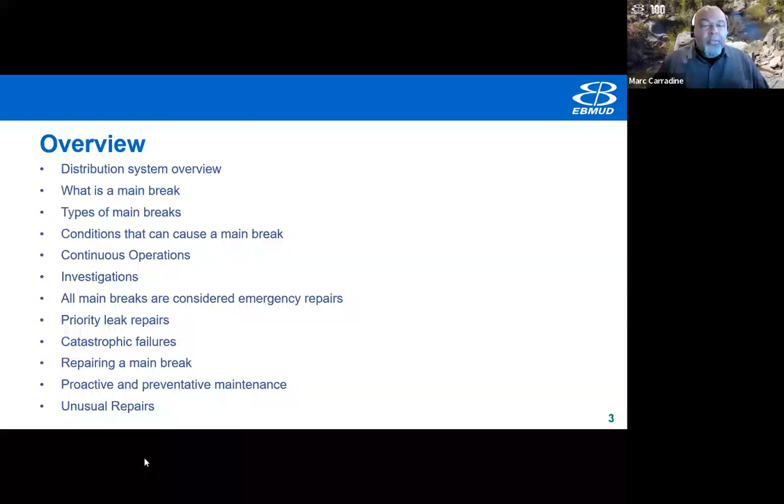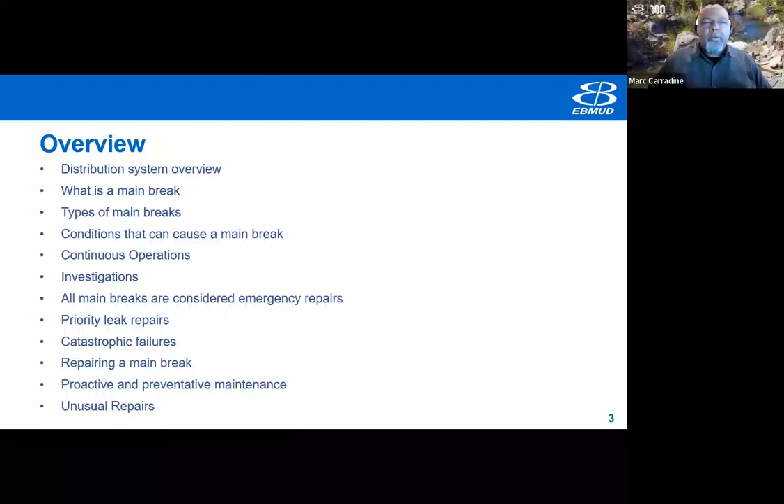How we prioritize our leak repairs. I'll show you some impacts on catastrophic failures, and then I'll walk you through repairing a main break, and then I'll talk a little bit about proactive and preventative maintenance, and then I'll show you an unusual break that we had earlier this year, somewhere late summer. So with that, next slide.

The distribution system. EBMUD serves 2 counties and 29 different cities, from Crockett south to the unincorporated sections of Hayward, and from Alameda east to Walnut Creek and portions of San Ramon. EBMUD's Distribution Maintenance and Construction Division has 5 work units, which are responsible for the investigation, inspection, and maintenance of 4,200 miles of distribution pipeline. In that, we have 60,000 plus system valves and approximately 31,000 fire hydrants district-wide. Next slide.

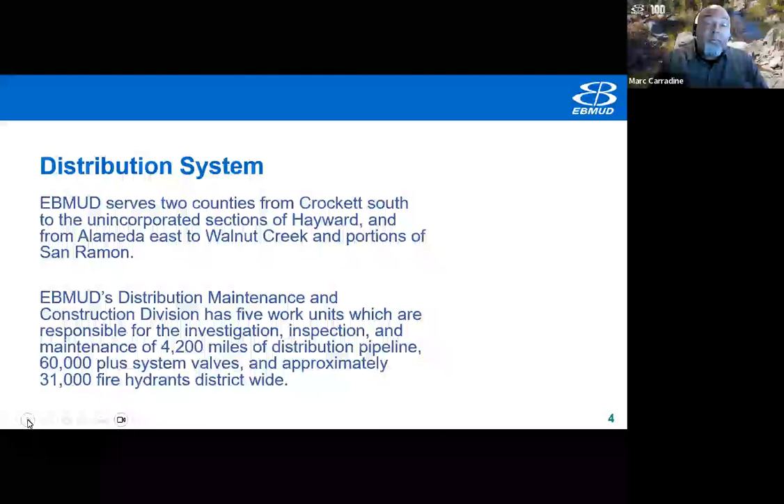What is a main break? The American Water Works Association defines a water main break as a failure in a water main that allows the escape of water and may allow the entrance of soil and other material into the pipe. This is true in some cases. At EBMUD, about 90% of our main breaks, we never reduce - we throttle the main down, but we never have negative pressure. We always have positive pressure on the main. So therefore, there's really no chance of any kind of contaminants or soils getting into the pipe. We're very careful in terms of the process that we take in making repairs. Next slide.

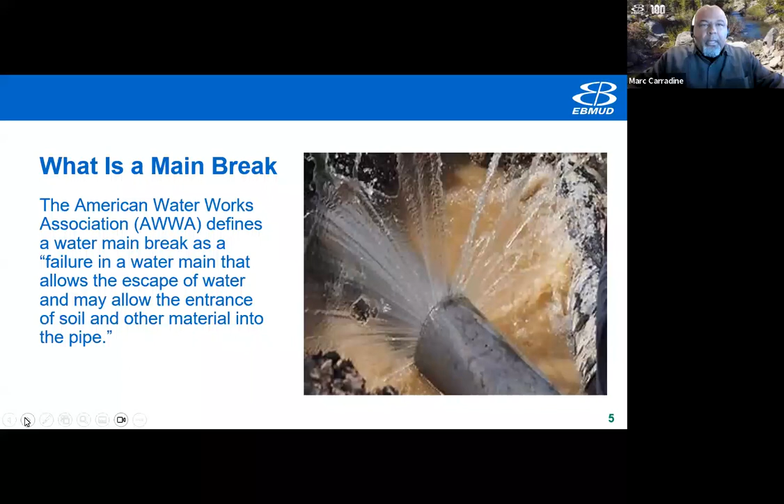These are some of the types of water main breaks. On the top, that's a full circumference break, and over to the right you also see how the pipe broke. That's typically done through movement of the ground. Below that is a longitudinal split, which sometimes can go from one end of the pipe to the other. Since pipes are put in sections, that would be probably the only section affected, and sometimes our pipes are up to 20 feet in length. That's typically done through corrosion or pressure spikes in the main. Below we have damage by others and pinholes from corrosion. The one in the middle was probably caused by damage from someone digging or excavating around our utility and didn't exercise caution to make sure another utility was daylighted before they continued to dig down. To the right is a picture of a steel water main where corrosion has taken control of the pipe and allows for a leak through small pinholes. Next slide.

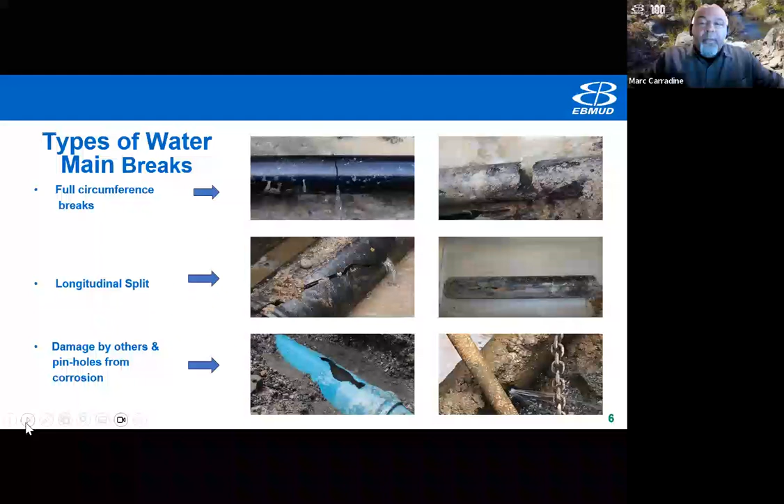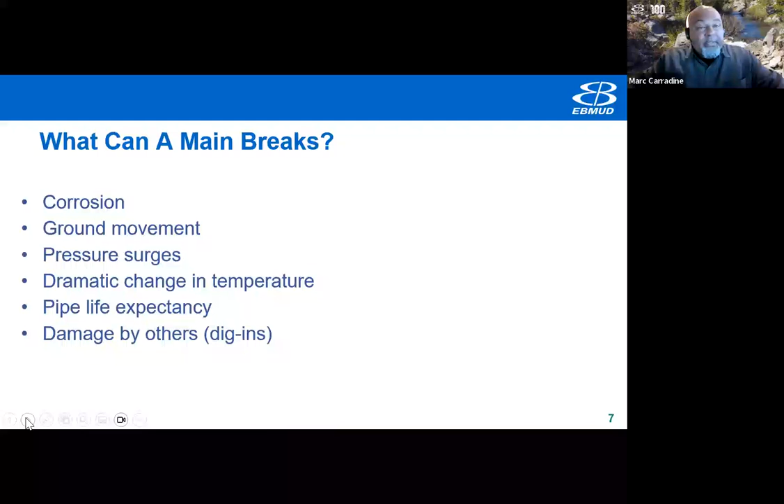So what can cause a main break? Corrosion from the soils, ground movement, pressure surges, sometimes dramatic change in temperature, pipe life expectancy, and damage by others.

So in the process of identifying leaks, we have a continuous operations work unit that's 24/7. Through our continuous operations, we receive about 13,000 calls annually, and 1,100 shutdowns. We have about 1,400 road closures and 300 hit hydrants, fires, and notifications.

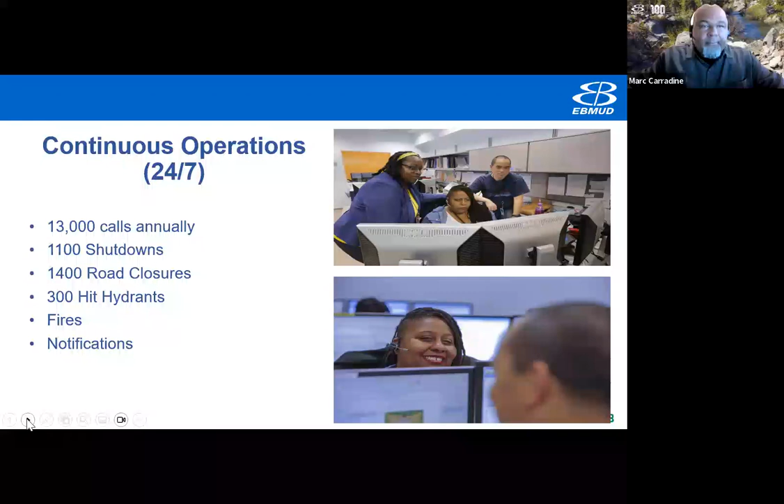This is the work unit that really is our contact to the public. So what happens when a call comes into our dispatch center? Basically, we dispatch an investigator and they go out to the site, and what they do is identify if there's a water source.

And if they can identify that it's potable water, then they set up BMPs, best management practices, which is basically sediment control, because we can't allow sediment to go into the creeks and streams. So we put up dams with sandbags to control the sediment. We also control the flow of water.

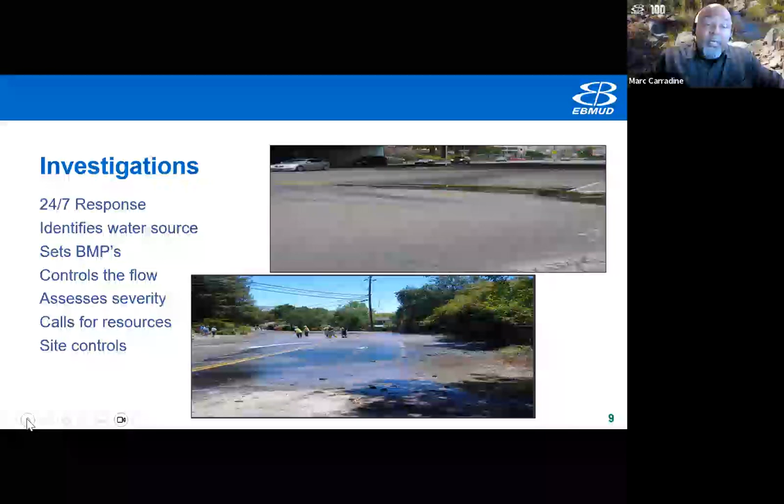We assess the severity of the situation, and we call for resources, and we set up site controls.

All main breaks are defined as emergency repairs, and the reason why is because they are subsurface leaks. We have no idea what's taking place underneath the ground, other than we know there's signs of water through our acoustic devices. They worsen by the moment. They cannot be controlled, you can only monitor them.

They are reactionary and scheduled, not planned events. They have the potential to destroy public and private property, as well as destroy streets and roads, and can harm fish and wildlife. Over to the right, you'll see that there's a priority.

I'm going to date myself here, but if you ever watched the show MASH, the 4077, all of the patients or the wounded that came in were treated on a triage basis. So this is basically what we do.

If you look at the picture on the bottom left, you'll see this is what we prioritize as a P5 leak. We have to respond to that immediately, and we're required to fix it within 24 hours.

Next to it is the P4 leak. I know the picture is somewhat small, but if you can see off in the distance there's a glare, and that glare is water that is surfacing. That's a P4, and we must have that leak repaired within 7 days.

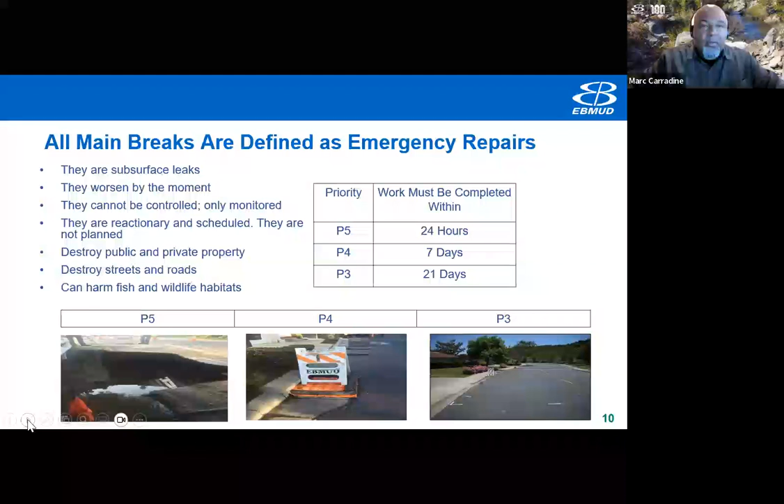If you've ever had work done on your street, you'll see a bunch of color paints like yellow, white, blue, and red. Those are all the utilities marking out their infrastructure.

So this is examples of catastrophic failures. On the top, that's Seminary Avenue in Oakland, which was a 6-inch cast iron main that actually broke. And then below that, there was a 6-inch main on a court in McLeod in Danville.

You can see the damage that takes place when it's a catastrophic event, all the work and restoration that has to take place in order to get out there first and actually start performing the work. So these things could be a big risk to the public and public safety.

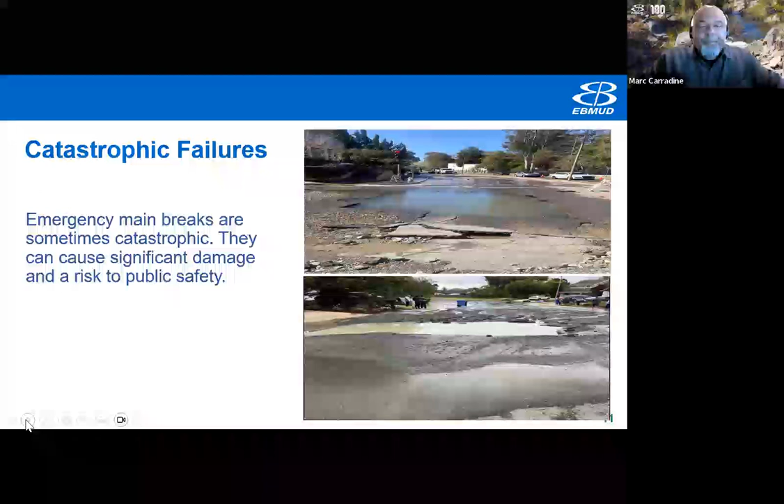This photo is of a recent main break we had on Hiller Road in Oakland, and it's a steel main, about 13 feet deep.

As you can see, the complexities of actually working to maintain or repair a water main, because water erodes anything that comes to it if it has pressure. The main was 13 feet deep here to the top of it. So in order to get down, we had to excavate, and the ditch kept caving in. Basically what is captured here is that main breaks are lengthy and disruptive.

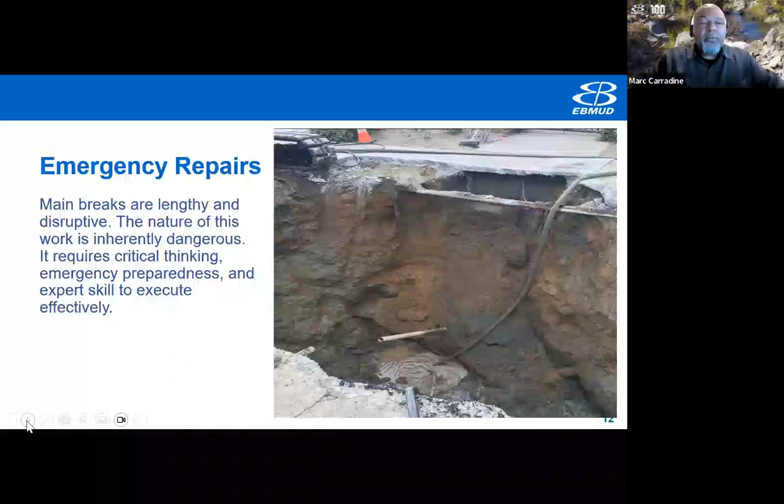And you can see from the picture, the nature of this work is inherently dangerous. You can't go into that ditch until it is properly shored. It requires critical thinking, emergency preparedness, and expert skills to execute a repair effectively.

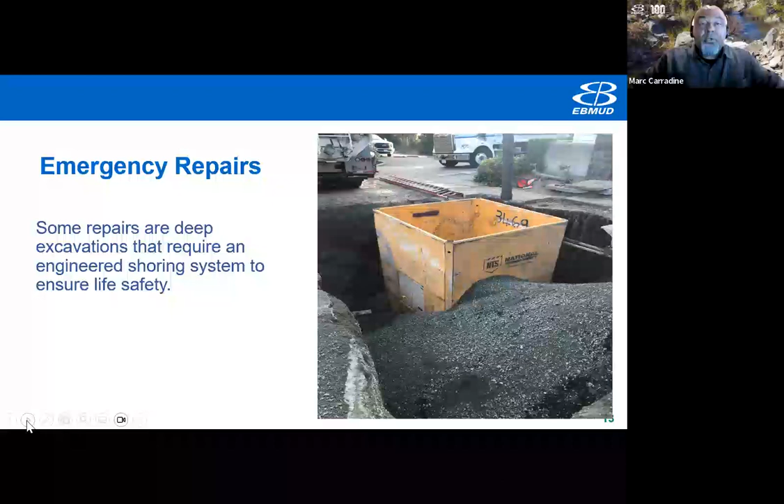This is continuing on the emergency repairs. This particular one, which is the same repair I just showed a second ago, is the shoring system that we had to install within the ditch, and we had to build back around the road in order to ensure safety while we're in it making any repairs. We actually had to take out 200 tons of soil for this particular repair.

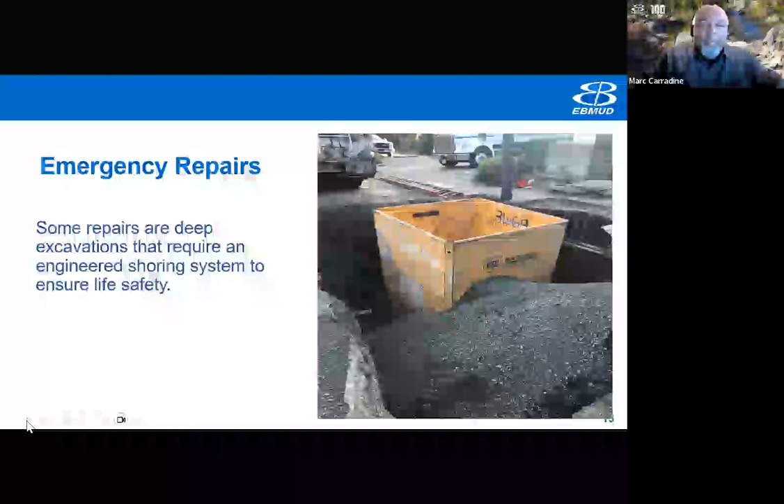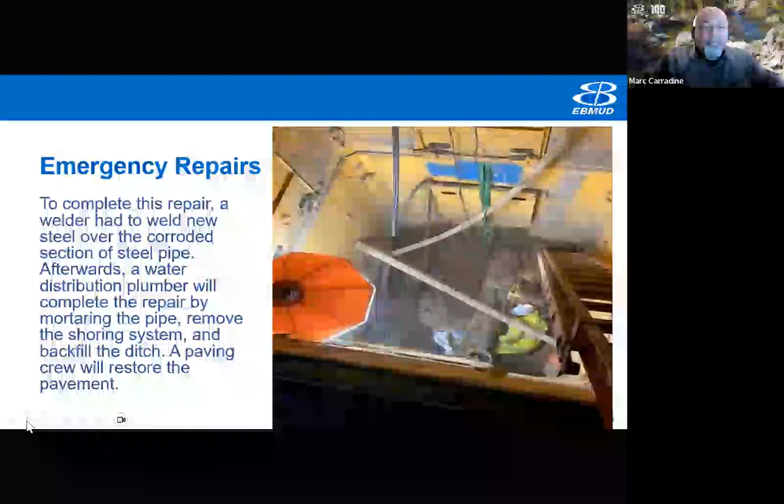So in order to complete this repair, we had a welder who had to weld new steel over the corroded section of pipe. Afterwards, we have staff, which are distribution plumbers. They will complete the repair after the welding by mortaring the pipe, and after that they remove the shoring and backfill the ditch, and then paving will come in.

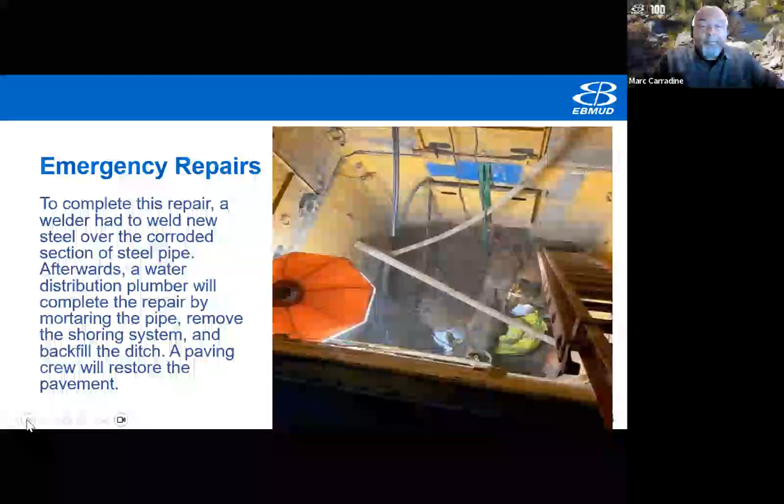But as you can see, this is basically a 10 by 10 steel box that is about 16 feet deep, to allow staff to go in there and repair or to be safe while they're repairing the main.

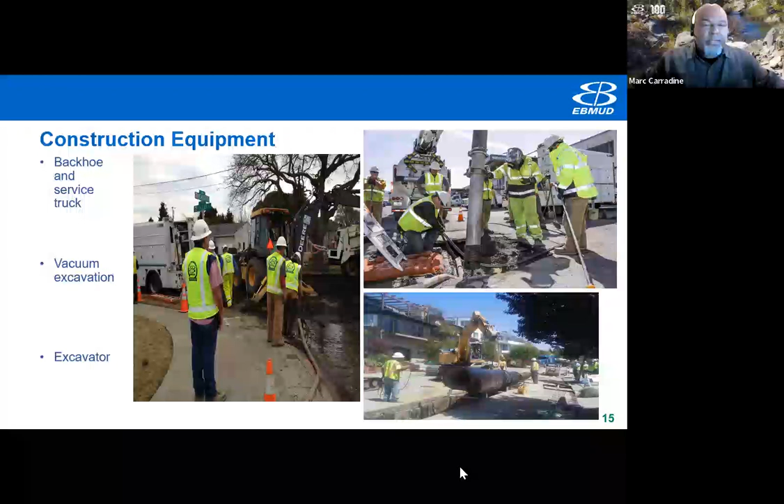Now note that I mentioned earlier that because we do not like to reduce to have negative pressure on the main, water is actually coming out of the pipe as we're making the installations. But we have rain gear on and we're protected from the water, and the ditch is usually short, so it's okay to perform the repair this way. But also it helps to maintain the integrity of the health of the pipe inside the water.

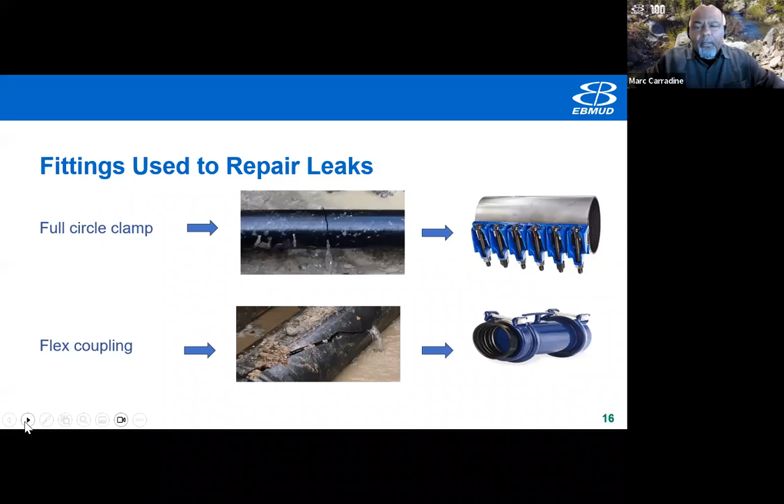Now we move to the area of proactive and preventative maintenance. What I mentioned before, several slides back, there was a picture of a street that had no water surfacing, but you had marks, and I explained the USA marking. Well, in situations like that, what we do is try to be proactive about water loss.

And so we have a program which is leak detection. What we do is use digital technology to try to identify leaks in areas where we believe may have leaks, or we also have this technology installed by creeks and in areas where we know we have a history of leaks.

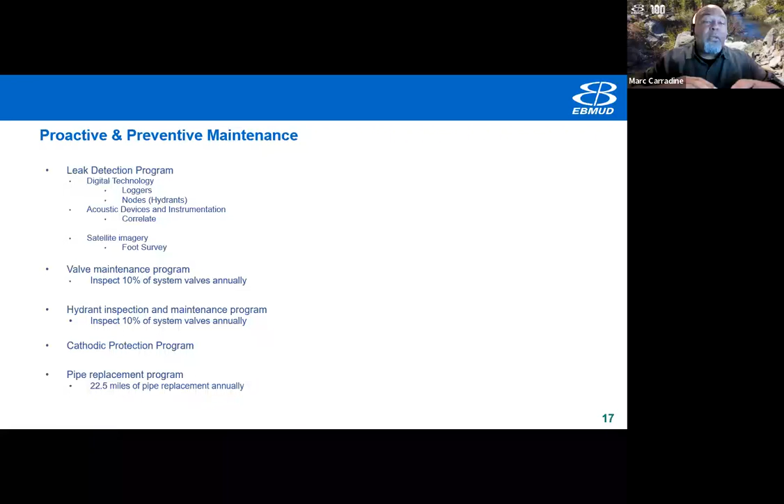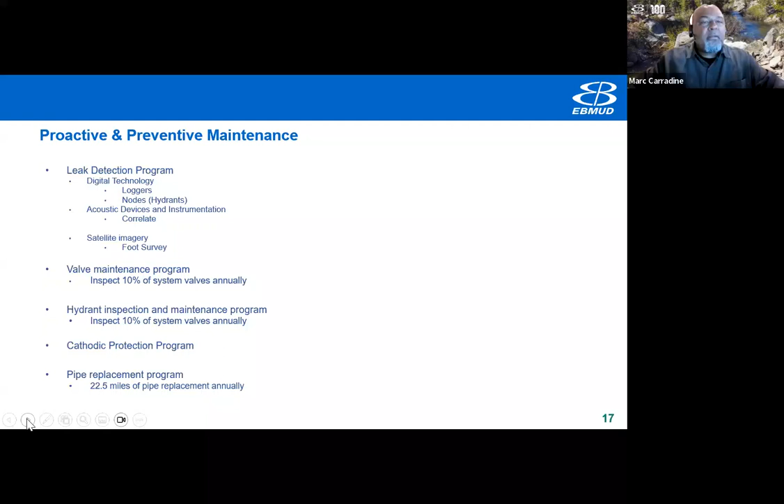It's because we want to make sure that we have those fixed. The other thing that we do, we go out and use satellite imagery where we'll receive thousands of points of interest where we believe there could be leaks. At that point, we go out and do foot surveys of the areas to identify if we do have a leak. We use acoustic devices, what we call sounding the main, to listen for activity and confirm if those points of interest actually did produce or identify a leak.

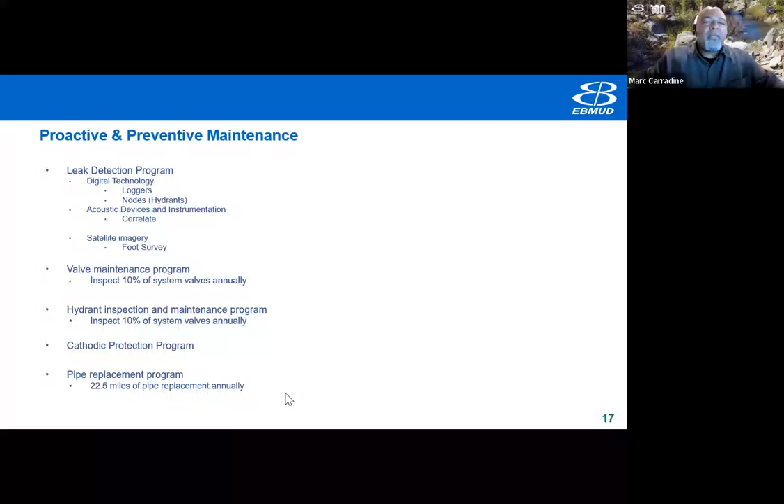Below that, which is our preventative maintenance, we have a valve maintenance program, which we strive to inspect up to 10% of our system valves annually. We also have a hydrant inspection and maintenance program, which we try to inspect up to 10% of our hydrants annually. And then we have a cathodic protection program, which tries to extend the life of the material so it runs its full course, by installing cathodic protection in the form of what we call anodes. The anode absorbs the electrolysis that comes through the soils and takes it away from our services.

And then we have a pipeline replacement program. Annually, our goal is to replace 22.5 miles. That's our goal now; next year it'll go up to 25 miles a year, but I'll allow David Cassett to talk about that during his presentation.

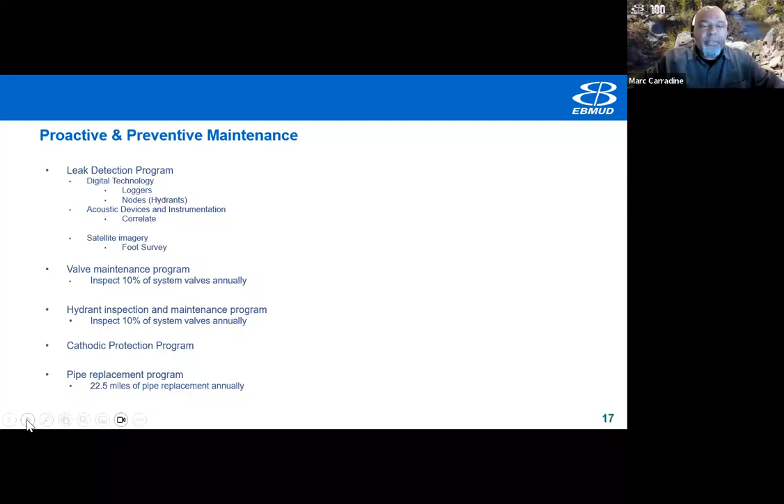In preparing to repair this leak, the impacts would have affected 300,000 customers. So in order to not impact them, because we didn't know if it would take a considerable amount of time to have the line down while we made the repairs, we brought online an additional treatment plant to make sure we had an adequate amount of service for those customers, so they wouldn't be without water.

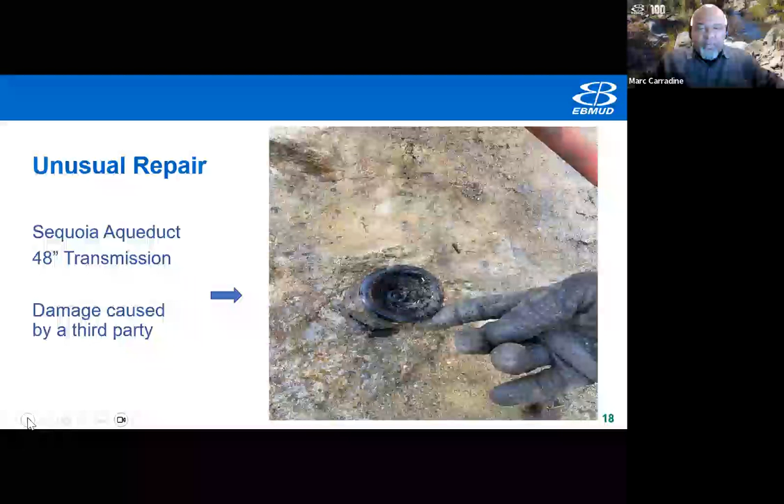Again, this is our Sequoia Aqueduct. It's a 48-inch transmission line, and if you can see where the hand has a glove, that's a glass bottle right there. Somehow the pipe was damaged; we don't know by who. We tried to look for records and historical information to find out if there was any work done there, but we couldn't find anything. But yeah, there was a bottle in the pipe.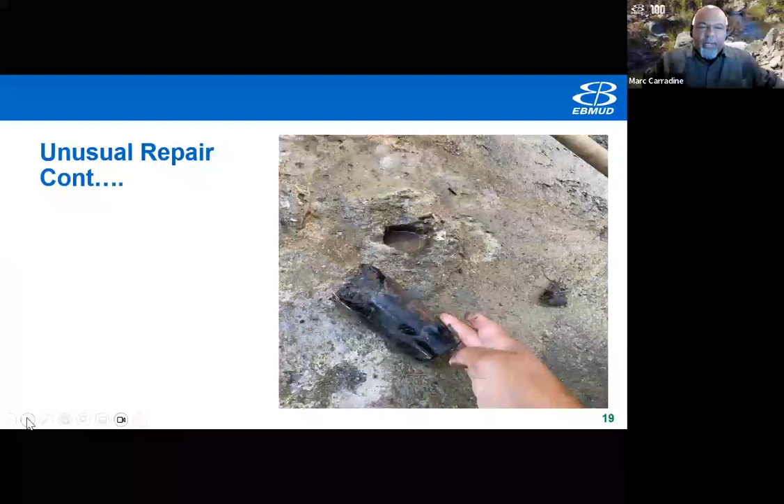And so this is a large chunk of concrete. Basically what happened, and this is what we assumed, is that when the leak was created, a little piece of rubber was put inside the hole, and then the bottle was wedged in there, and they poured this big chunk of concrete on top of it. Surprisingly, it held for what we imagine was a long period of time, but then it finally surfaced. And so this is what we found.

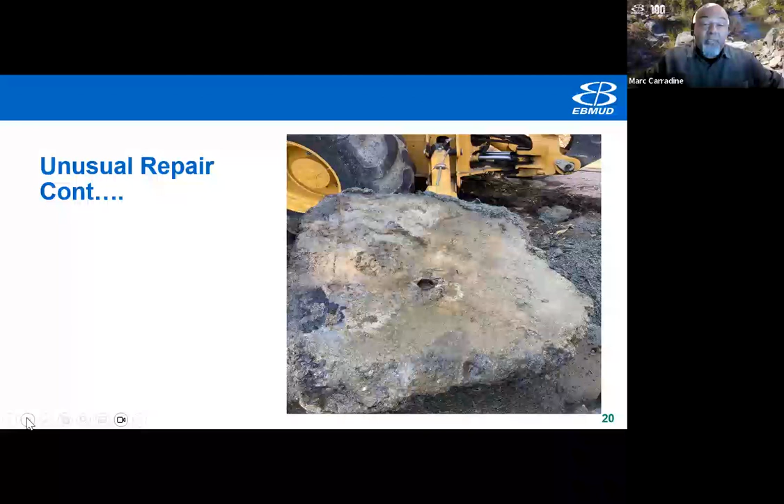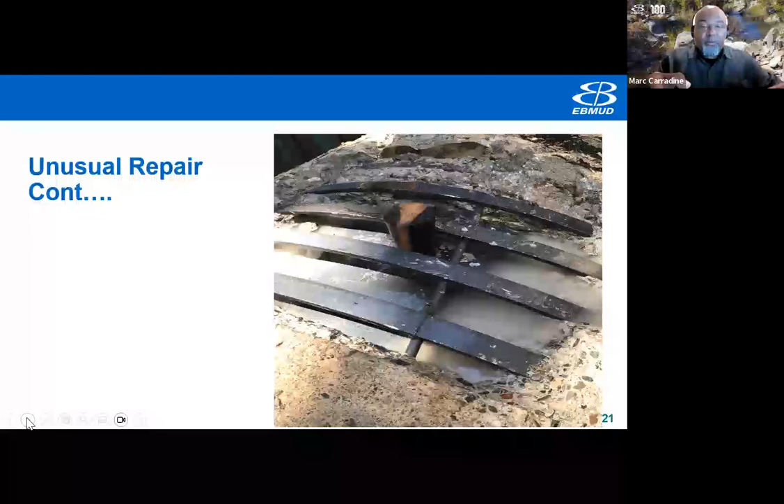Next slide. When we removed it, we exposed the pipe to make sure this was the extent of the damage. We put a redwood plug in there to stop any more water from coming out. Next slide.

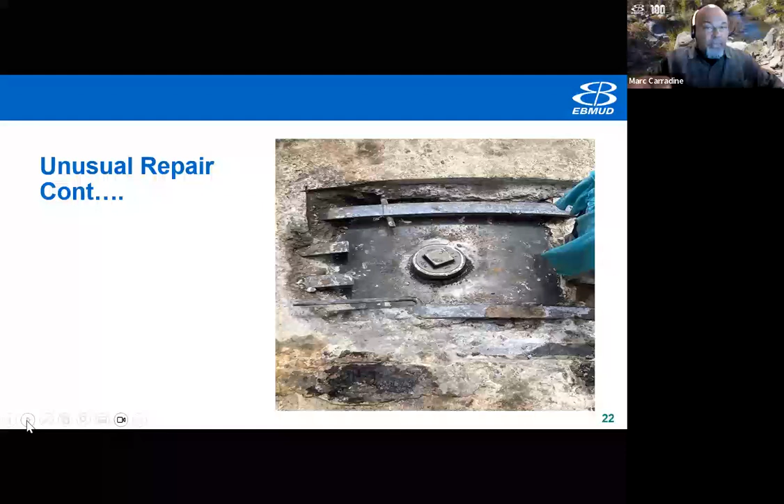After that, we cut the bars that went across the pipe. These bars are there because the pipe itself is actually thin metal. It's the bars embedded in the concrete that provide the stability of the pipe to endure the weight of the road and everything that travels on it. On top of that, you'll see a coupling with a plug in it. So this is one of our typical repairs on a steel main with a small leak. Next slide.

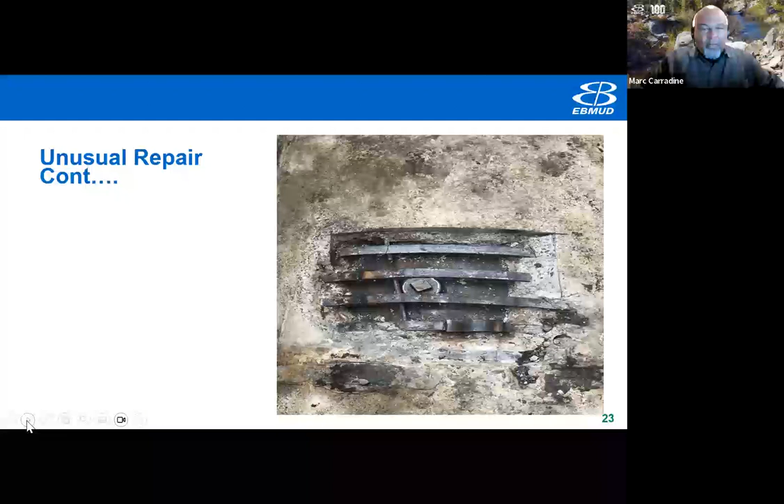After that, we reinstalled or replaced the bars to make sure that we do not compromise the integrity of the pipe. Then we actually remortared—well, it's actually concrete—so they poured concrete and finished it, and that was the end of it. It's a very unusual repair on a leak.

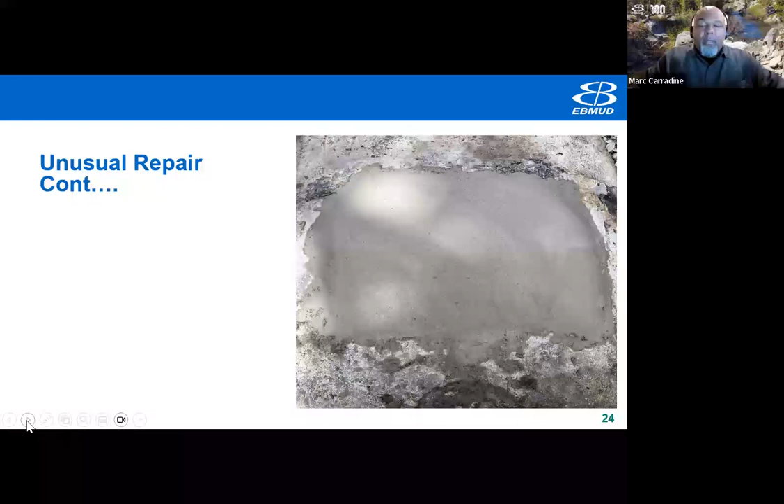But that is the anatomy of a main break.

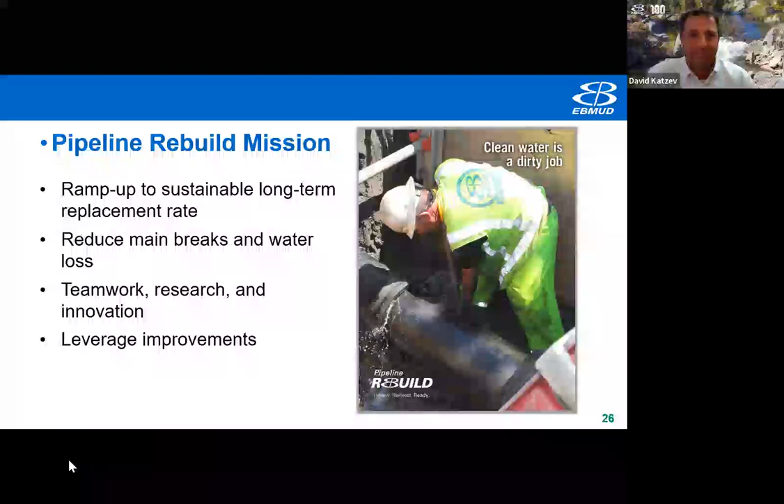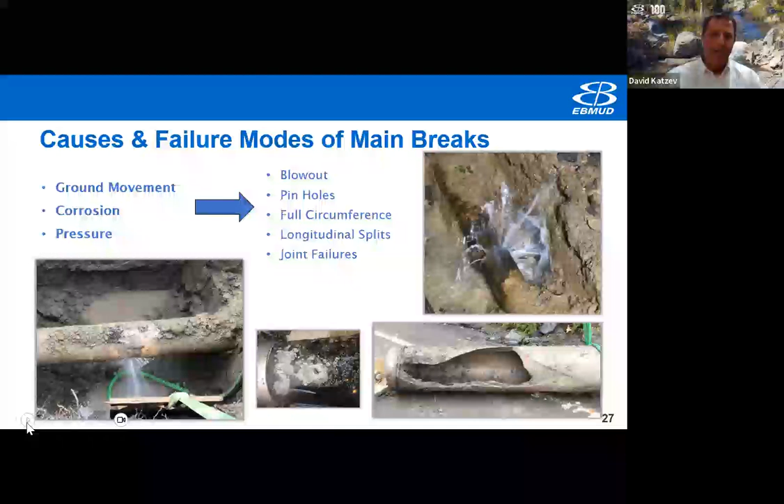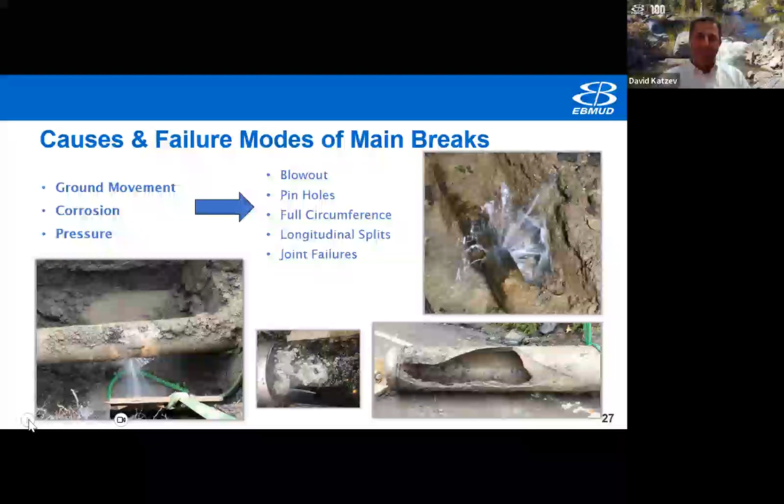Marc was talking about main breaks, causes and failures. Just to review, we've got ground movement, corrosion, pressure that he talked about. It causes different types of breaks—you can get a pretty big blowout, catastrophic break, the pipe can break around the whole circumference, or longitudinally it can split. We take all of that data, capture it on an annual basis, assess it, evaluate it, and consider it when putting together our plans and designs for new replacement projects. The data that's collected in the field by Marc's crews—they log everything in terms of what type of break it is and what the cause is. We take that data and make data-driven decisions based on what kind of material and how we're going to go replace the main, so it doesn't happen again.

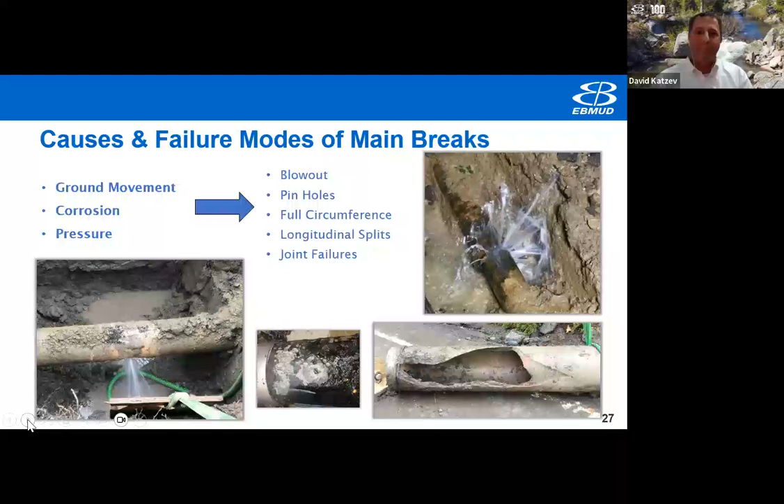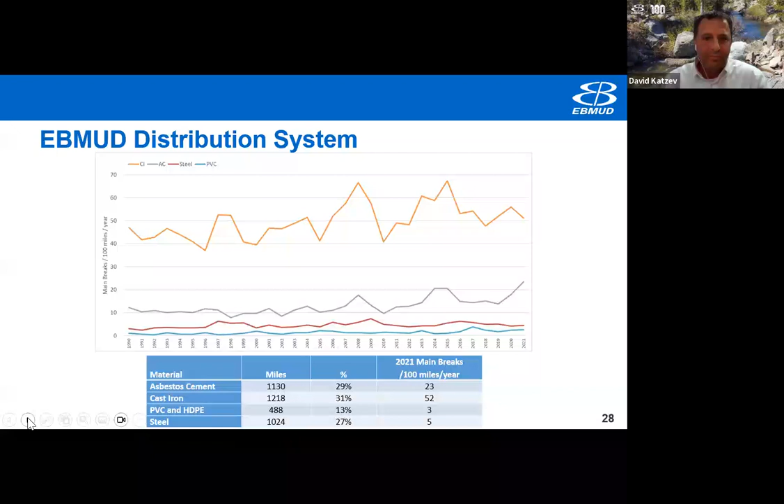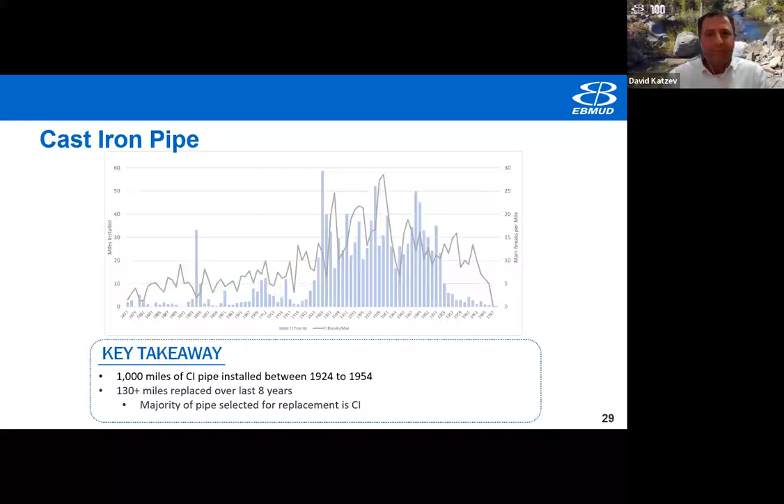So the 130 plus miles in the last 8 years is good, but it's not good enough.

You have to do it methodically, carefully. You have to hire new staff, purchase equipment. So you just can't ramp up super aggressively. And we'd rather take a more methodical approach to ramping up our replacement rate as we can monitor our main breaks in future years.

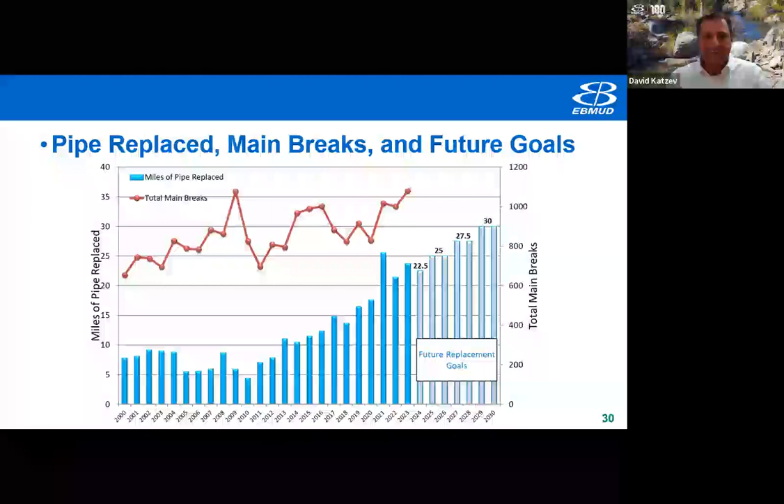So what do we do in design? We take all that data, the data I was talking about, the main break data, the failures, the causes, the types of breaks. We assemble all of that data, the pipe materials, the year of the install, the size of the pipe, the 6, 8-inch, 12-inch, 16-inch diameter. We take all of that data, the environmental conditions, we assemble it all into a package,

and we actually apply machine learning to it. We look for trends, we look for patterns, we look to see where these pipes are breaking, and then we prioritize those replacements. We go after the worst pipes. We go after the right pipes to replace.

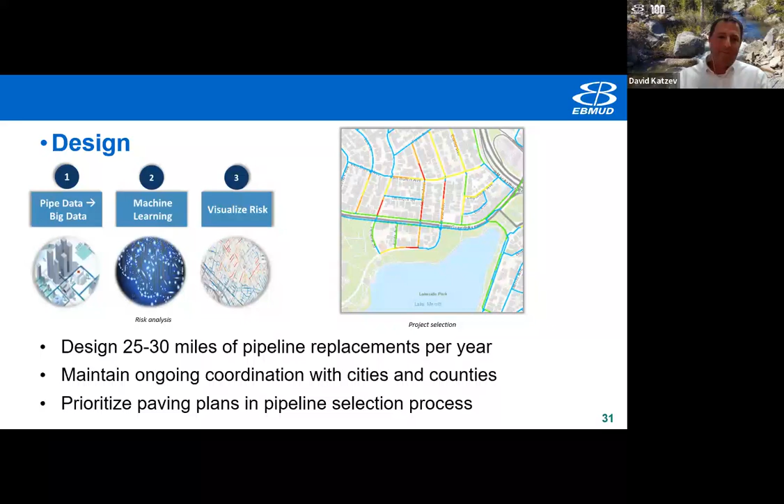We have a whole GIS map of all of our pipeline replacement projects. From each city and county we work with, we have their paving plans and we overlay the two together. They don't always match, but when they do match, we will work as hard as we can to get in there and replace the pipe before the city or county paves the road.

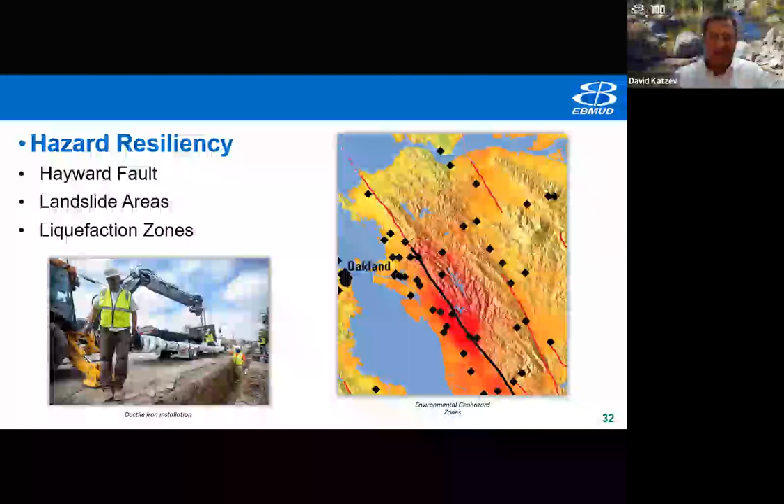We also have landslides. We have land that's gradually moving. And then we also have liquefaction zones right next to the bay. We have a very complex geologic system within our whole service area. So when we're designing our pipes, thinking about materials, hazard resiliency is a priority. We want to put pipes in the ground that are going to withstand any kind of movement and not break.

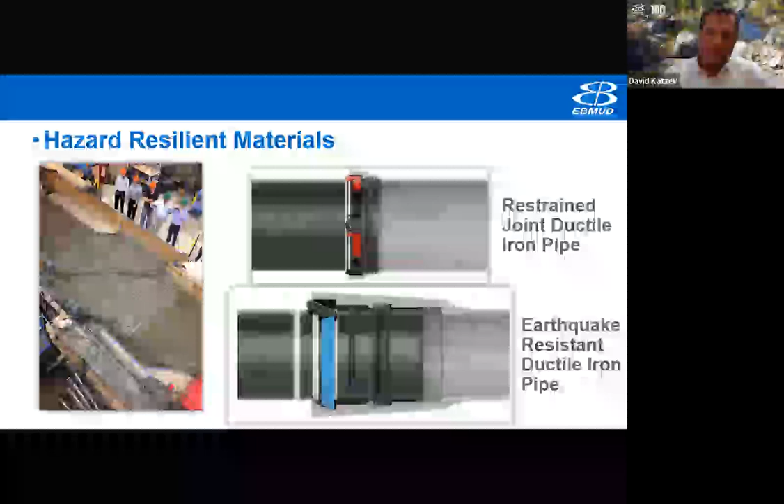We're installing the earthquake resistant ductile iron pipe in areas near or adjacent to the Hayward Fault Zone and in areas where we have a significant landslide. Now, when we choose these materials, we're actually quite careful in evaluating all the research and studies that have gone into making these materials.

The picture on the left there is a picture from back at Cornell University where they actually simulate fault ruptures. There's actually a pipe underneath that grid soil that you see in the picture. It's filled with water, it's pressurized. They simulate a fault rupture, and they see how well the pipe performs. So we take a lot of great pride, effort, thought into choosing the right materials.

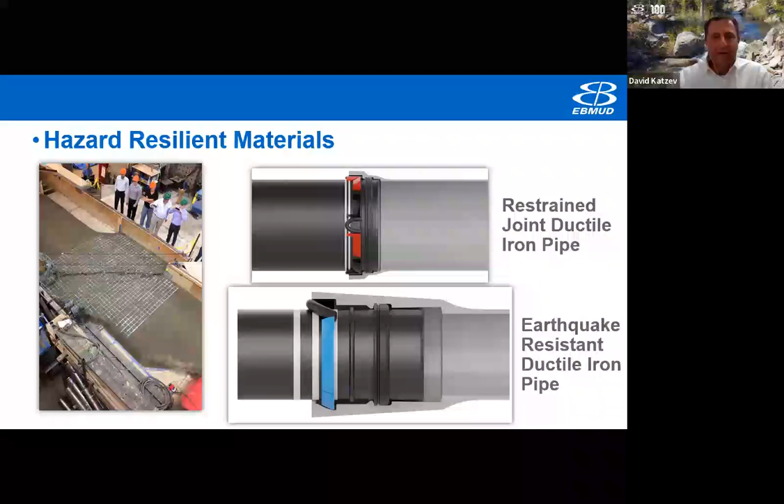We're putting different types of stresses and strains on this pipe. We're using fiber optics to monitor all these different stresses and strains, really to ensure that we're putting in the best material that we can. The material that's going to be hazard resilient and the material that's going to last 100+ years. So we've done lots of different pipeline tests,

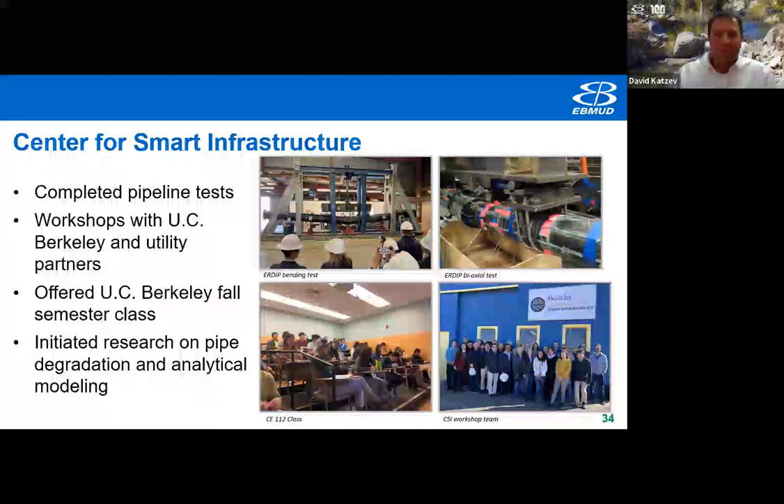and we're actually working with a lot of other utilities in California: Los Angeles Department of Water and Power, Metropolitan Water District, San Francisco Public Utilities, EBMUD. We're all in collaboration with the Center for Smart Infrastructure to really put together solutions to these big challenges that we have. And that is it for my portion. And I think Sun Kwong and Mark, we can go to questions.